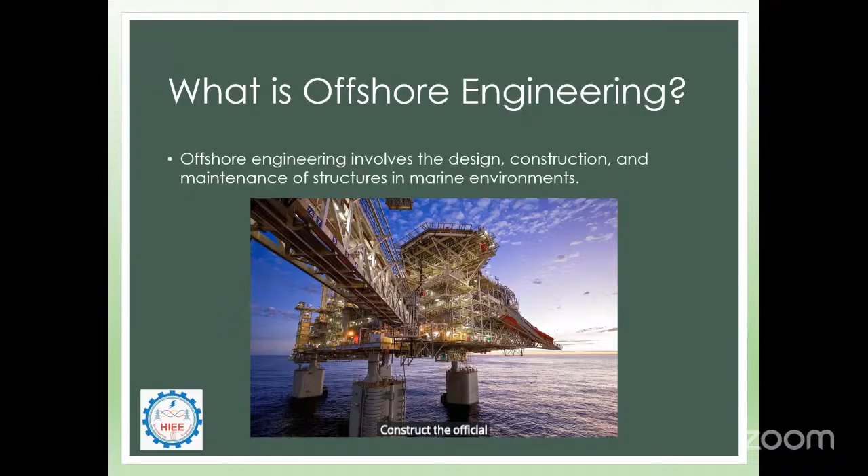So, importance of offshore structures - what do offshore structures do? Oil and gas extraction is the main concern and major thing we do with offshore structures. Recently there is more scope for renewable energy, communication, and maritime infrastructure being built offshore, using seaways as the main platforms to build energy.

These structures should be built to withstand the harsh environment of waves, wind, and seismic activity. So why are we building these offshore structures? To extract fuel, to produce renewable energy, and for communication - our broadband connections go under the shore. These are the things we do by building offshore structures.

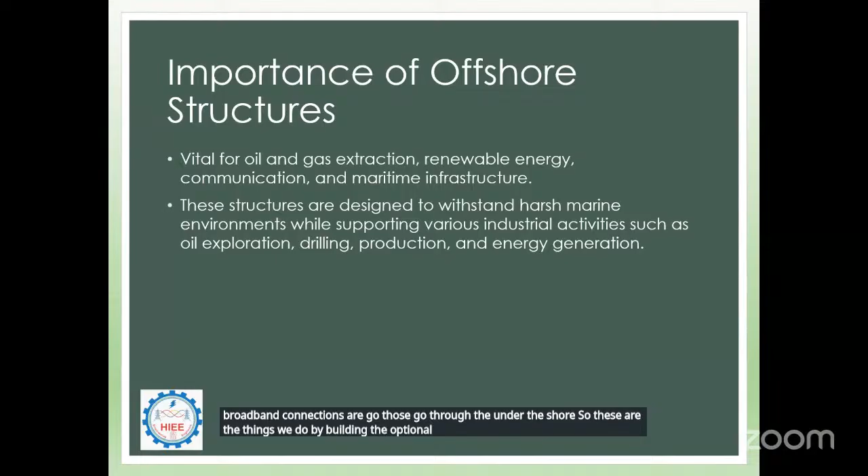Next, what are the types of offshore structures? Platforms, compliant towers, semi-submersibles, FPSOs, spar platforms. We know we haven't heard about these mostly - what are these structures, fixed platforms, compliant towers, semi-submersibles, what they do, why they're built, how they're built. What are the things we need to know to build these? This will be a much interesting session for you, and this will be an added valuable session for you guys. So be excited.

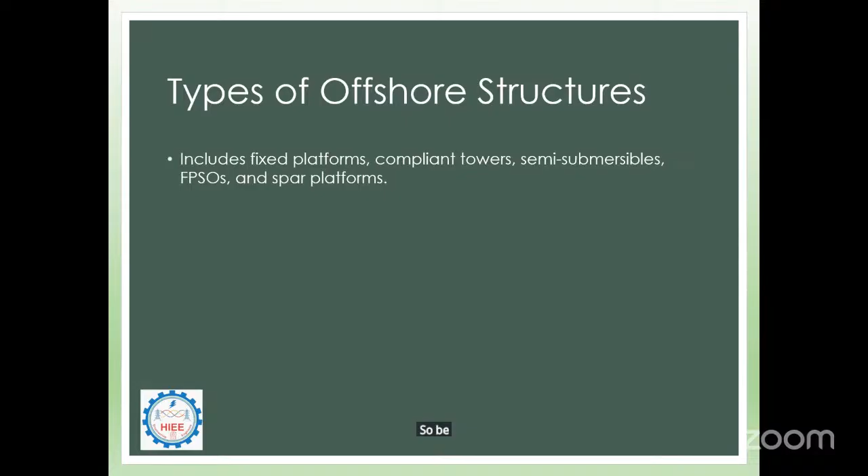So these are the types of structures in offshore. We can see there are six types of platforms. The first one is a fixed platform. The name itself shows that it is fixed, it won't move.

These structures are built for only up to a depth of 1500 feet. The main purpose of these structures is digging oil from the sea or ocean and extracting it, along with gas. So the first one is a fixed platform, with depth up to 1500 feet.

If the seabed depth crosses more than 1500 feet, then we go to the compliant tower. This tower also has a limit, from 1500 to 3000 feet. Beyond that we can't go, because the harsh environment of the ocean or sea won't let it stand.

Next one is the sea star. This is from 500 to 3500 feet. We can prefer this one, except that fixed and compliant towers are between 0 to 1500 and 1500 to 3000 feet. This sea star is 500 to 3500 because it is a floating platform.

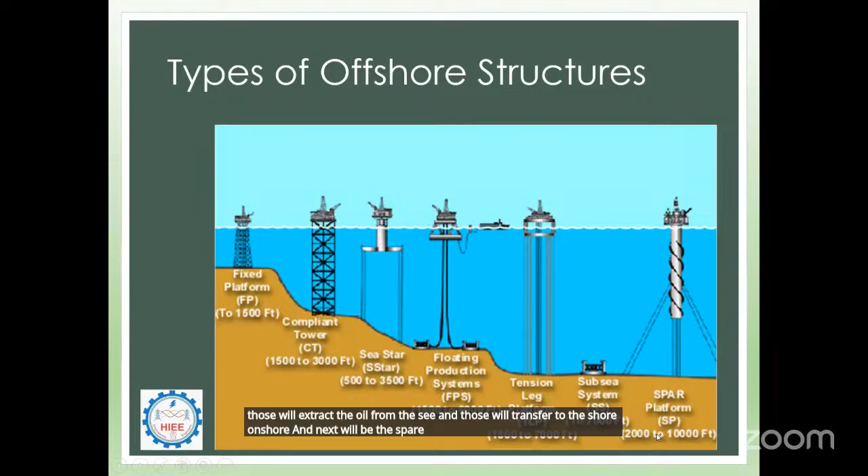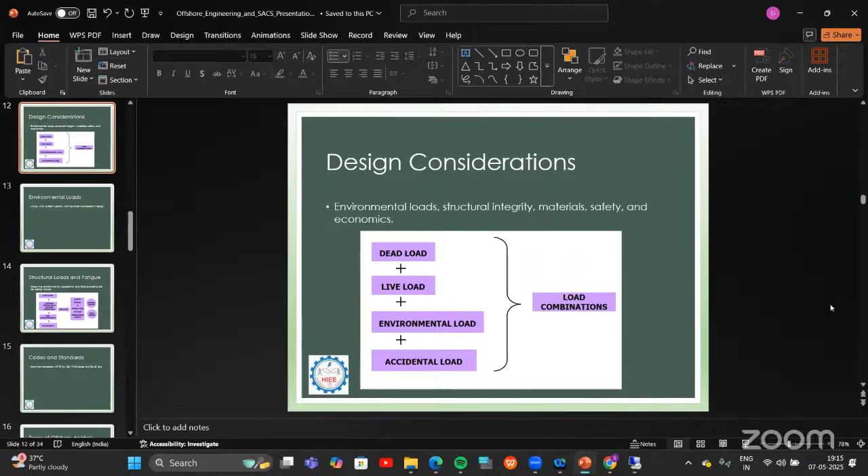The design considerations - we are much aware of the environmental loads, structural integrity, materials, safety, and economics. So by picture, we are seeing dead load, live load, environmental load, accidental load. So we know what dead loads we can consider in the offshore structure. Just imagine in sea, what dead loads will be there - equipment load, instrumentation load will be there on the platform.

Next, live load - in the sense like vibrations of the equipment, if there are any humans to operate it. Then environmental loads. The major difference for onshore and offshore structure is environmental load. Here in environmental load there is waves and wind. In offshore, there is a huge impact of the wave loads and wind loads. Those are the governing loads on the structure.

Next, accidental load - in the sense blast, or if any ship gets impacted on the platform. Those are the accidental loads we consider. And by using these four loads, we combine and apply them to the structure.

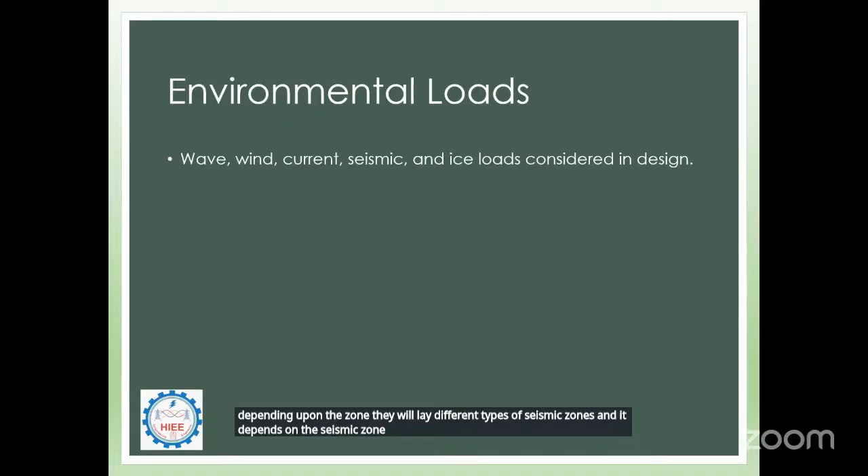Next, structural loads and fatigue. We have discussed before - dead load, live load, environmental load, and accidental load - and how we deal with these loads. There is a load combination we get from these loads. If the dead load and environmental load combine once, and the live load and accidental load combine once, and all four combined once, whichever has more impact, that we apply in the structure, and that decides the structure strength and sizes of the members.

So here we can see load combinations, and next material properties, support conditions. The material properties and support conditions are the basics in our engineering - what type of material you're using, the yield strength of it, size, diameter, length and breadth of it. These are the basics in our engineering. Support condition - the fixed condition, pinned condition, roller condition. What support conditions are you going to give? And next, soil characteristics.

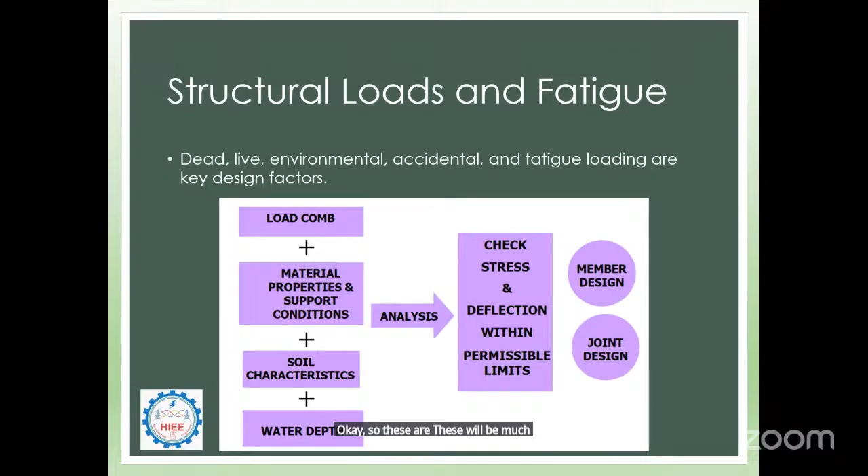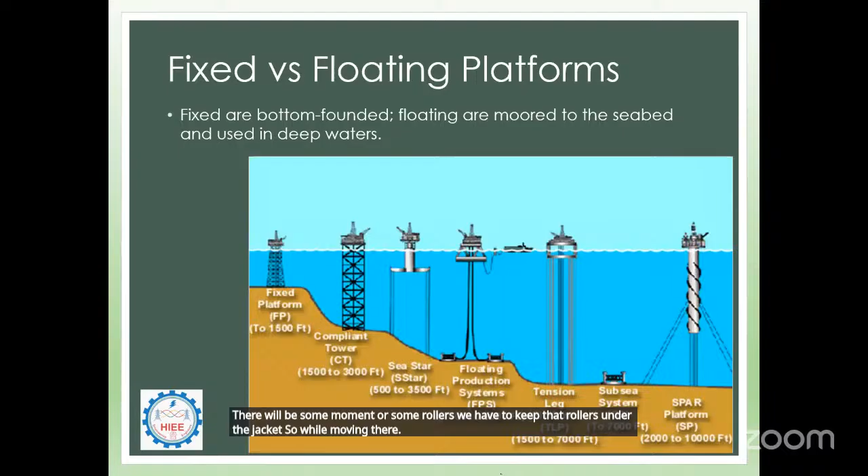This jacket structure, while we're moving from ship into the water, there will be some movement or rollers. We have to keep those rollers under the jacket. So while upending it in the sea, some stress will be created on the members. The structure should withstand that.

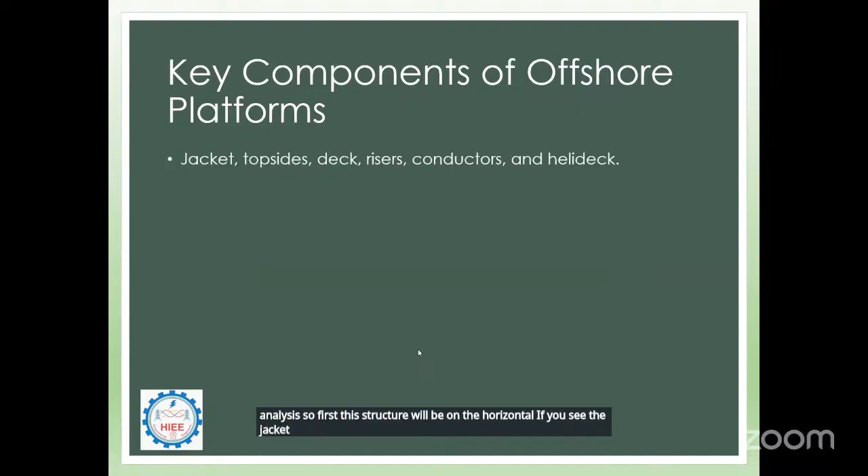Next, on-bottom stability analysis. First the structure will be in the horizontal position. If you see the jacket, while carrying it, it will be horizontal. It could be more than 40, 50 to 120 meters. So it will be horizontal while carrying on the ship, and we keep it in that straight position. For that there will be one kind of analysis, and pile drivability analysis.

These are the pre-service analyses, carried out before placing the jacket. Next is in-service analysis. After the jacket is fabricated, transported, and placed in a fixed position, then we go to the in-place analysis.

After fixing it, we consider in-place analysis, earthquake analysis, fatigue analysis, ship impact analysis, pushover analysis, cathodic protection, and other analyses. In short, in-place analysis for the jacket structure. I will show the image.

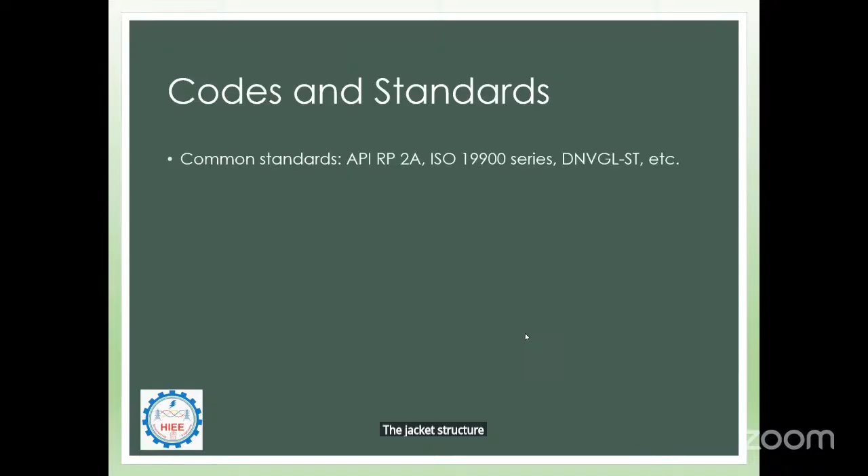Just imagine this is the structure. It's placed in the ocean, and all the equipment is placed on it. We consider all the ultimate load, and waves will be acting on it. This wave loading is a typical load. We consider 1 year, 100 year, 1,000 year, and 10,000 year waves as maximum loads.

So for in-place analysis, after placing it in the fixed position, we consider all maximum loads like wind load and wave load, and check whether the structure withstands them or not. That is called in-place analysis.

Next, earthquake analysis. By the name, we can say there will be much impact of earthquakes in oceans. We know that tsunamis occur in the ocean due to earthquakes. So for that kind of earthquake loads and vibration, the structure should withstand.

Next, fatigue analysis. Fatigue in the general term means it got tired, but here fatigue means repetitive loads. In concrete we call it creep failure. Has anyone heard about creep failure?

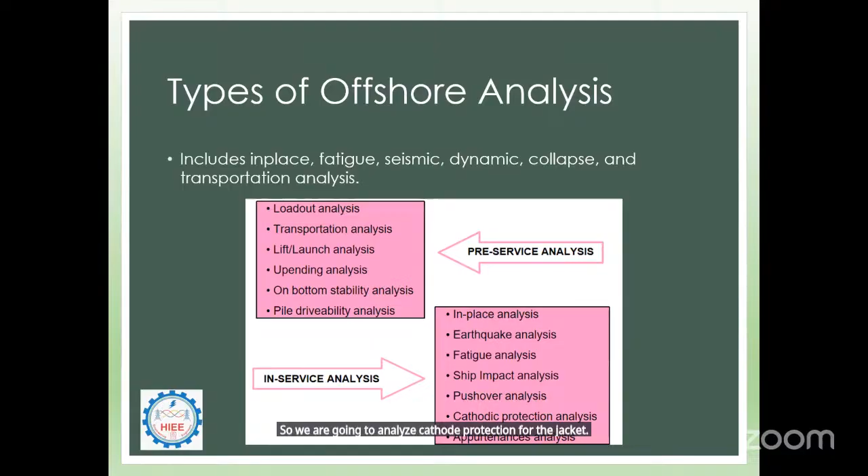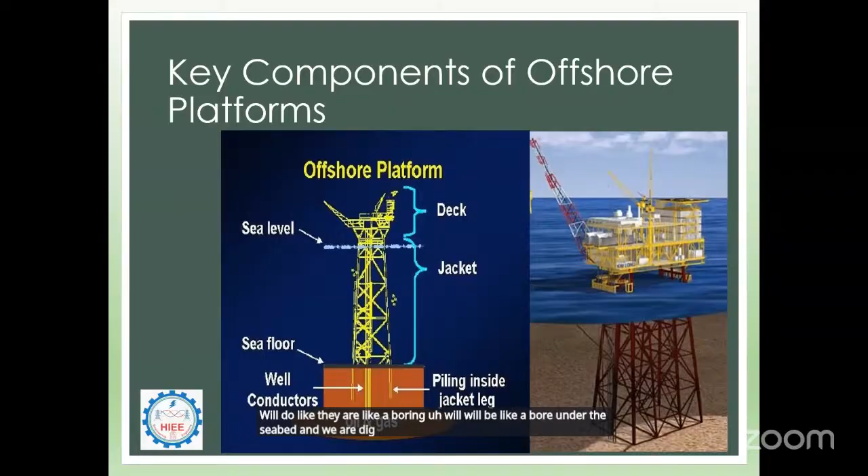Next, appurtenances analysis. For the jacket we have seen not only the main structure but also some vertical members, called conductors, J-tubes, and wellheads. The jacket just supports the topside, but conductors and J-tubes act like a bore under the seabed where we are digging the oil. They are used to protect the wells and cables. Those are the appurtenances analysis.

So next, after the pre-analysis is done, we move to in-service analysis, which we have also covered.

Next is asset integrity and inspection. If our structure is placed and is in service and operating, after a few months or years we have to inspect it to check if it is working properly. There should be regular inspection, especially if the structure was built 20 years back. We inspect the structure to see how many more years it can withstand, doing some assessments to check if it is safe or not. Those are asset integrity and inspection.

Next, the role of structural engineers. We now know what offshore engineering is, what structures exist offshore, what kinds of analysis are done, and what loads we consider and how we analyze them. So what is our role, what are we going to do? We perform design, analysis, review, and inspection planning. These are the things we do while working on a project.

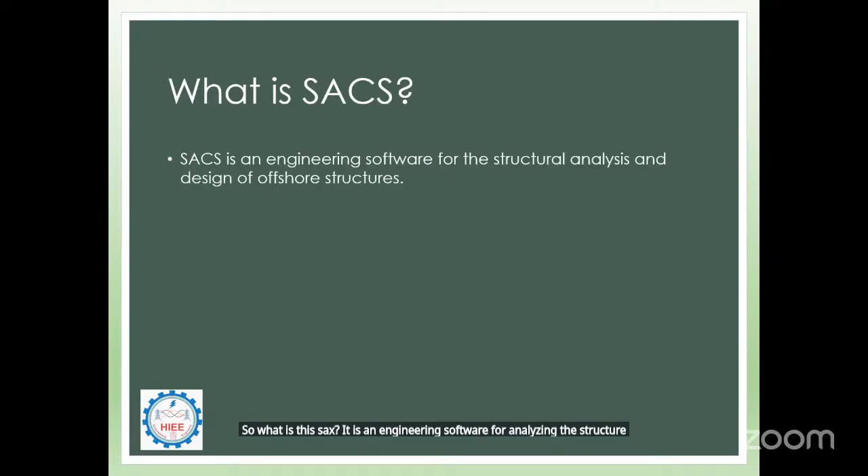In the SACS interface, after modeling the structure, this is how we can see it. The first one is the jacket structure, the second one is the compliant tower, this is the wind turbine, and this is the FPSO, which looks like a ship. All the analysis is carried out on this SACS software, which is the most demanding software in offshore engineering.

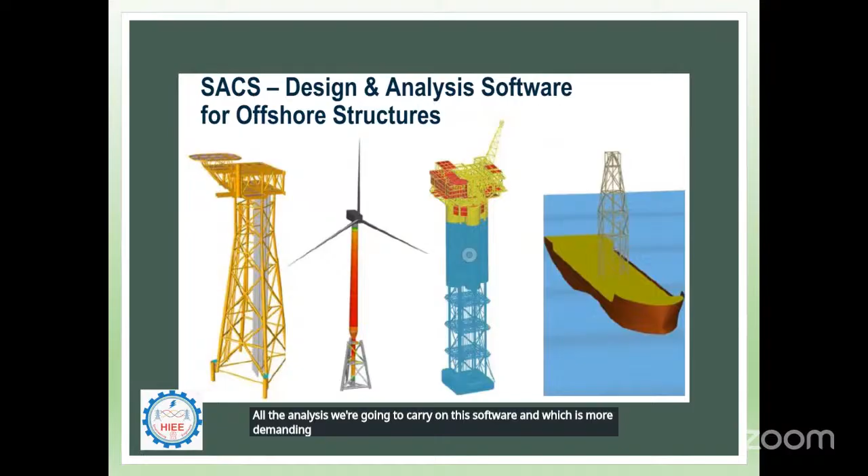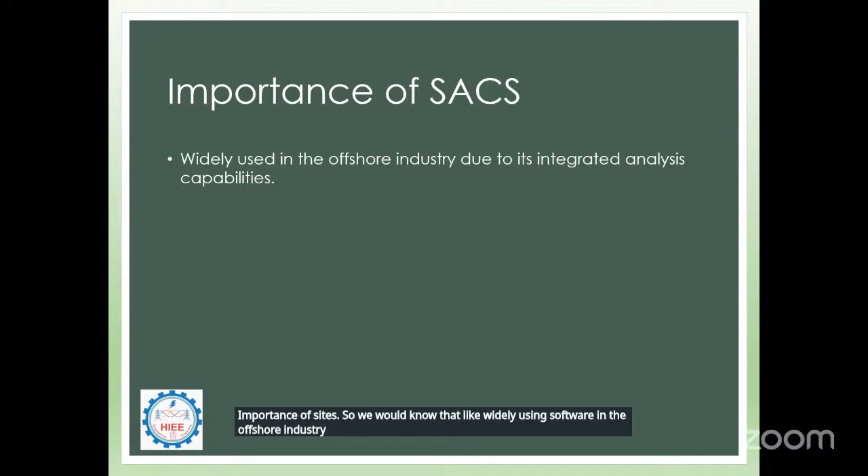Importance of SACS: it is widely used software in the offshore industry with more capabilities compared to other software. So what kinds of structures can we design and analyze in SACS? We know software like STAAD, AutoCAD, and ETABS from our engineering studies, but I think most people don't know about SACS software, because there is no scope in our curriculum to learn about offshore engineering.

Next, structural analysis for the topside and jacket. We know the jacket is the structure built below the sea level, and the topside is above sea level. In topside and jacket analysis we can include fixed platforms and the compliant tower. Topsides also include TLPs, semi-submersibles, spars, and FPSO, which are floating platforms, where we perform motion and stability analysis. All these kinds of structures we design in SACS and analyze for pre-service and in-service conditions.

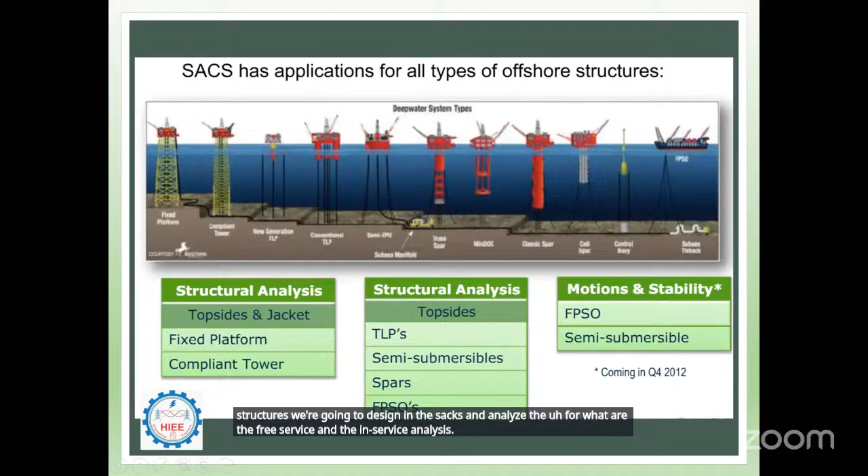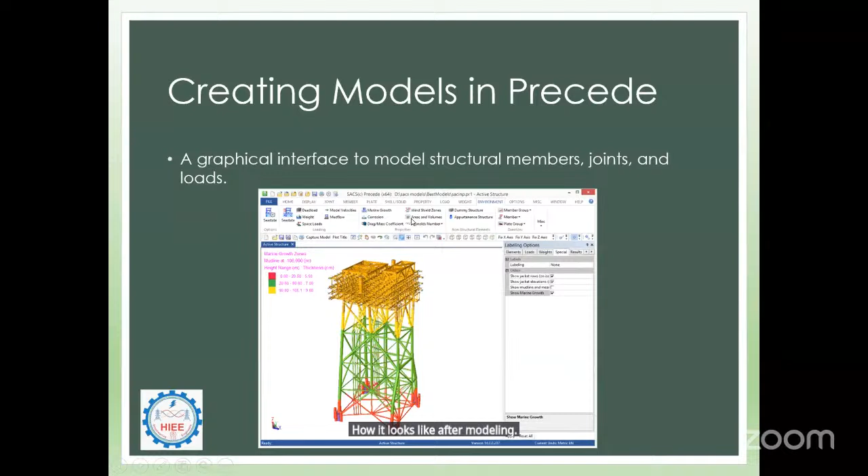Here, this is some kind of image you can see how SACS interface looks like and the structure, how it looks like after modeling. I will show you how the SACS interface will be there.

We have discussed the analysis we are going to carry out in SACS. In in-place analysis, as discussed in the preliminary stage, we are going to check the structure stability for static, environmental and operational loads.

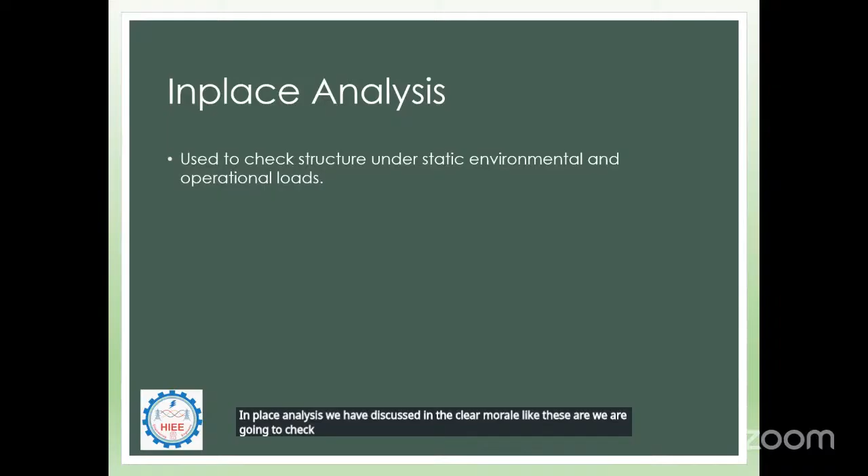Next is fatigue analysis. As we have discussed before, like creep load, same as creep failure - we are going to check the damage due to cyclic loading using SN curves and stress ranges. SN curves means stress curves.

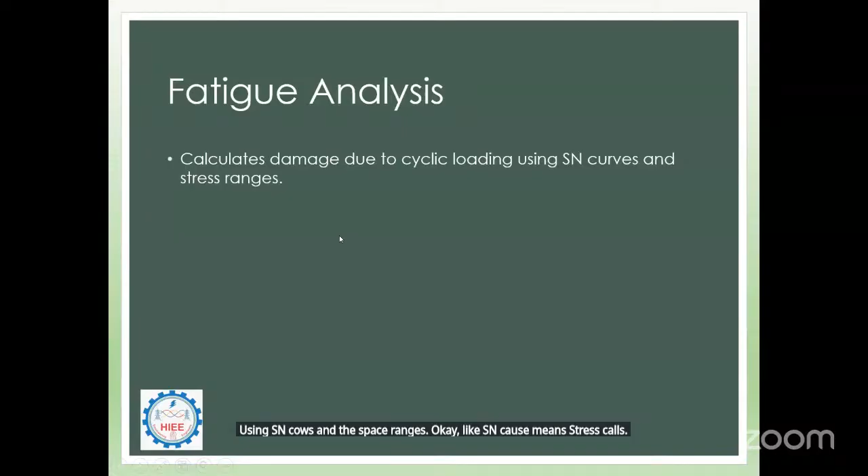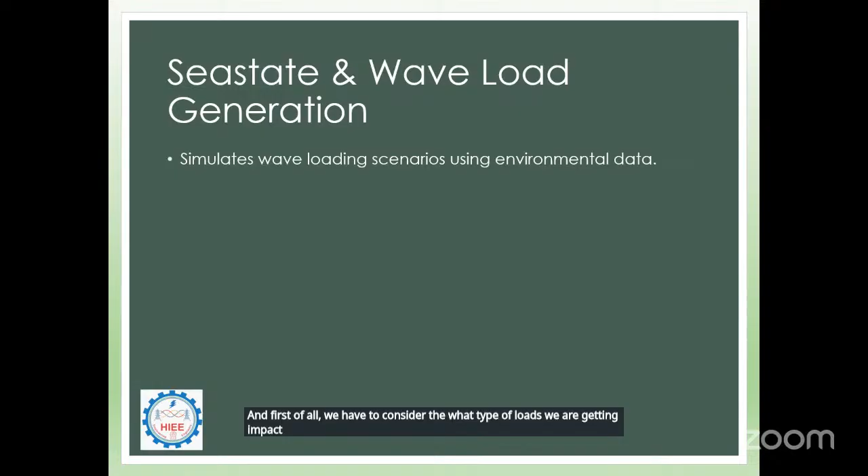So, sea state and wave load generation. For a particular place and region, there will be different types of waves, different heights and velocities of waves depending upon the region and place. So for the location where we are going to construct that structure, we have to consider separate sea state loads and wave loads, first considering what type of loads we are getting - the impact of loads - then we apply those loads to the structure.

Next, pushover and collapse analysis. Before we discussed pushover in the sense of overturning of the structure - for extreme loads, extreme horizontal loads, is it withstanding in its position or is it tilting? We are going to check this behavior of the structure in pushover analysis.

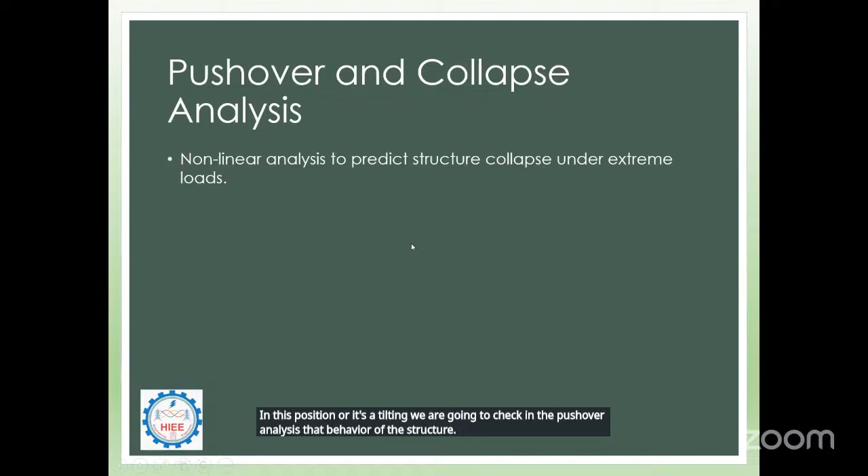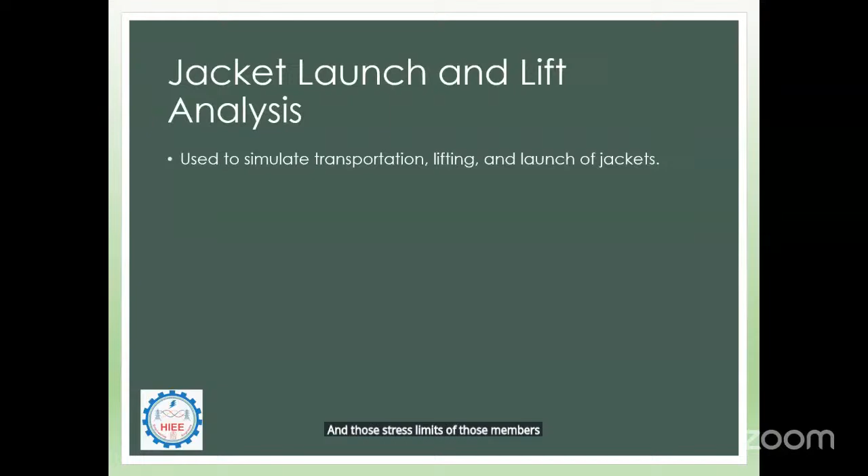Next, jacket launch and lift analysis. Jacket launch, as the name suggests, after fabrication we take that jacket structure by ship to its place and launch it there. Before launching, we lift it by cranes. For that lifting, we check if it withstands the stress limits of those members and whether they stay within limits or not.

And spectral and time history analysis - this is like fatigue analysis, similar names, synonyms, so we can say that. Spectral analysis or fatigue analysis - we check whether the structure withstands repetitive loads and dynamic loads or not.

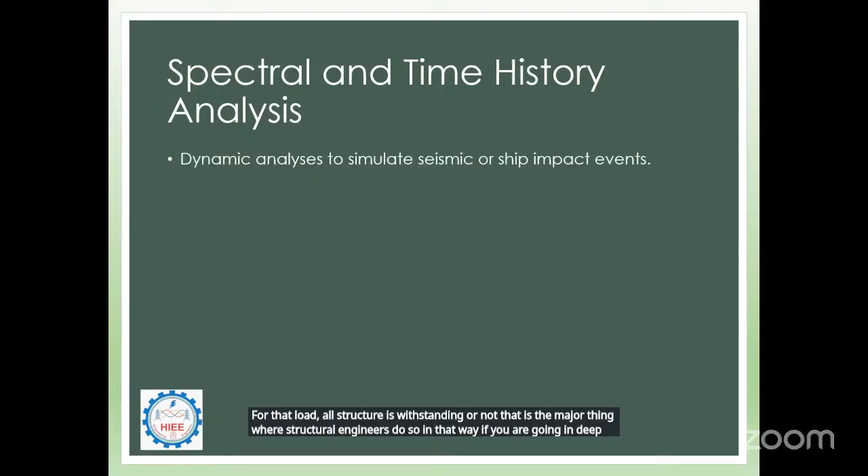So with SACS or whatever structural software, the basic idea is: for a particular place there will be some particular loads. We check whether our structure withstands those loads or not. That is the major thing structural engineers do. If we go deeper into this, there is a magic we can feel as an engineer.

Next, the interface - what SACS does. We know STAAD and AutoCAD, right? We can model our structure in STAAD and AutoCAD, and we can directly import it into SACS also. There is that convenience in our SACS software.

And how the workflow in the software will go - first we are going to model the structure. Like, if some people are aware of STAAD, they know first we create nodes and then members. In that way, we model the particular structure we decide on.

After modeling that structure, we go to analysis. We've seen pre-analysis and post-analysis - almost 9 or 10 analyses we perform for that particular structure, because it should withstand all extreme conditions of environmental loads and dead loads without failure. After analyzing, we do code check - we know most offshore structures use American and European codes; Indian codes have no scope for oil and gas offshore structures. After that, we generate the report.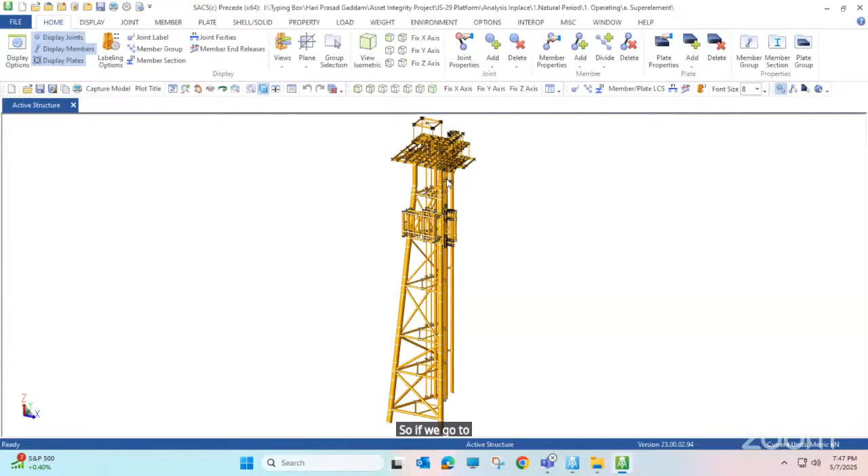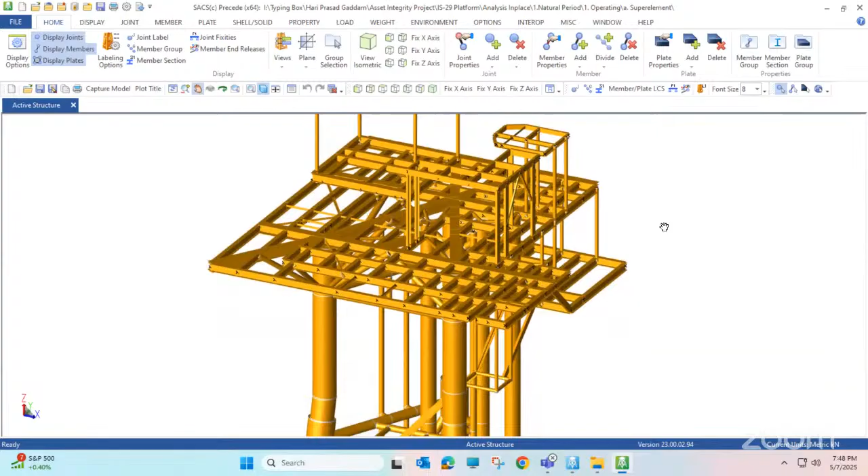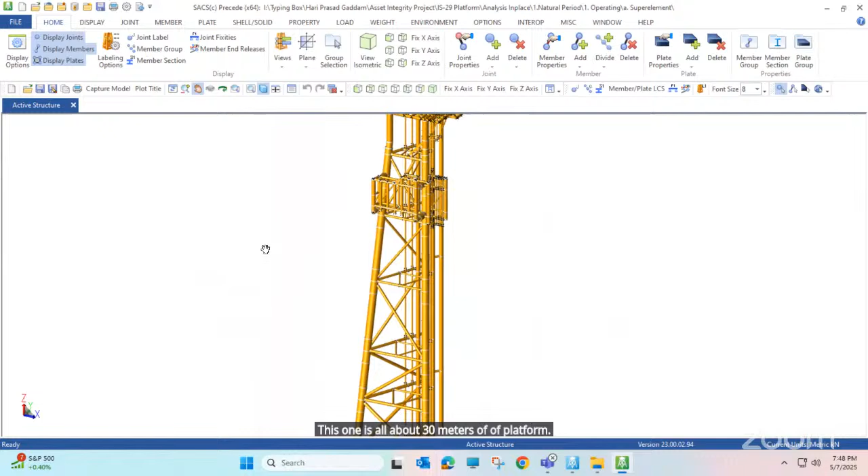So if we go here, this is the jacket structure. These horizontal things we can see, we call the top side. These are all the equipment loads we consider as loads on it. The bottom one is the jacket. This one is about 30 meters of platform, which we call an offshore platform. And this one is the boat landing.

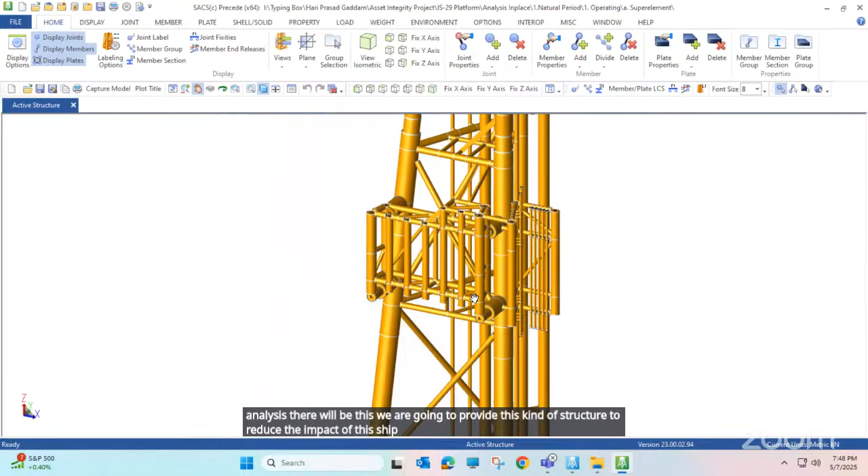Boat landing - we have seen ship impact analysis, right? So for that ship impact analysis, we provide this kind of structure to reduce the impact of the ship on the jacket structure. Here on the top side, this is a very small platform I'm showing you, but there will be huge platforms. This is just a small one, and on this there are some things I'll show you after completing this interface introduction - a few images of how offshore structures will be.

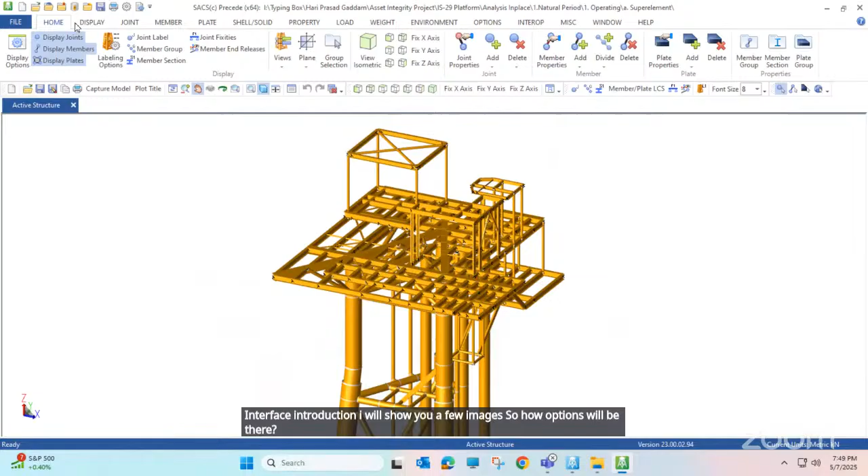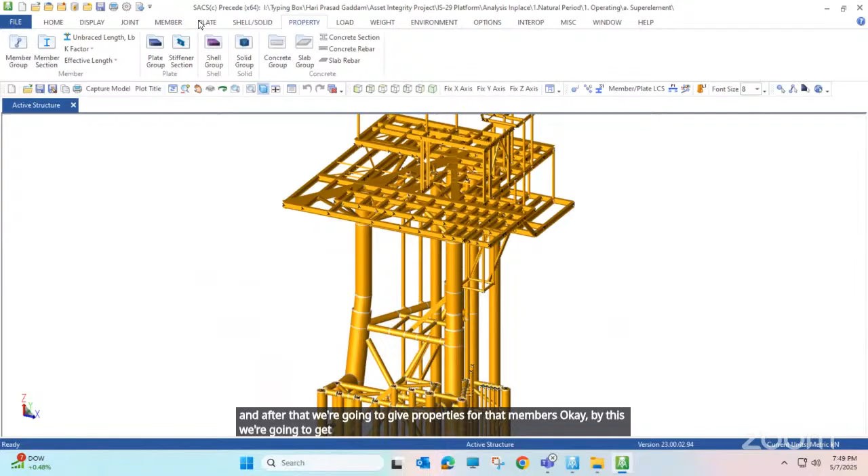And how we are going to model it - here it is a joint, right? So we add joints. After creating joints, in between joints we add members and plates, and after that we give properties for those members. By this, we give details like diameter, thickness of the members, and load properties, like joint loads or member loads. If you're aware of STAAD, you might understand how this interface looks.

Load, weight, environment - environment includes things like corrosion, marine growth. After installing the jacket platform in the ocean, there will be some marine growth on it, like leeches, grass, all growing on it. So that also has some impact on the structure, which we consider. Corrosion we also consider, and wind, and all the sea state loads we consider. All these options will be available in this.

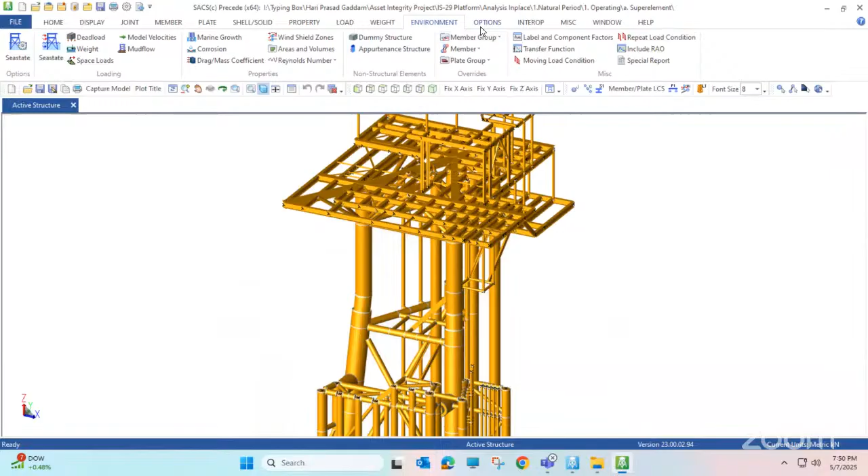So for designing a structure, first we get to know how the structure should be there. In that way, we are going to model the structure. Then after modeling it, we are going to apply the loads on it.

Loads like dead loads and live loads first. Dead loads like equipment loads will be the major things in offshore. Live loads means human loads, where we can take it as 2.5 kilonewton per square meter, which we apply on the free areas of the structure.

After applying loads, we are going to give properties and sections for the members, and then wind loads and wave loads we are going to give. After applying all those loads, there will be some load combinations.

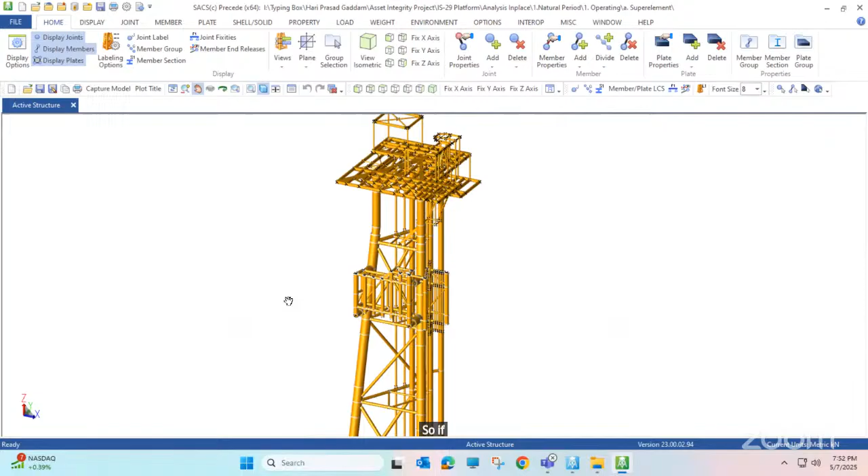By taking those load combinations, we are going to design the members. So if our structure is like that, and this is the sea level, and this is the top side, we are getting dead load in the vertical direction, and wave loads and wind loads in the horizontal direction.

There will also be seismic vibrations and live loads. By combining all those loads, there will be maximum stress occurring on some particular member you are going to design. For that stress, we get to know we have to provide some particular size of member. This is how we are going to design the member.

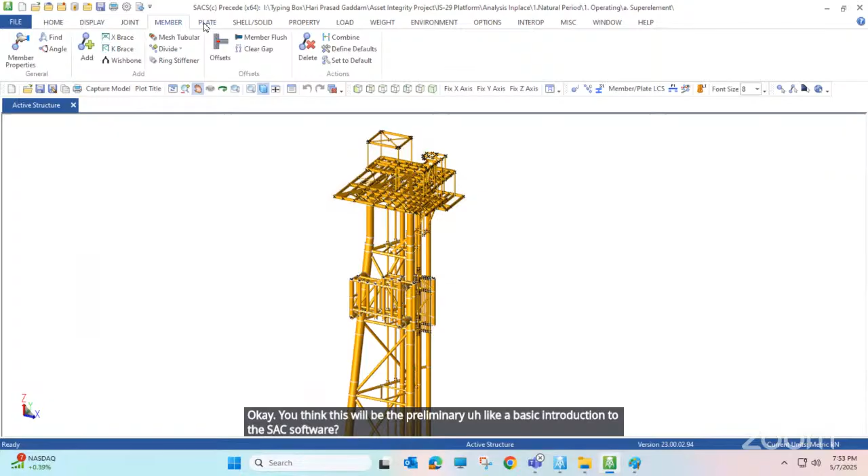I think this will be the preliminary, basic introduction to the SACS software. By learning it, it will be much interesting, because you are going to deal with natural forces, and that will be much interesting to know.